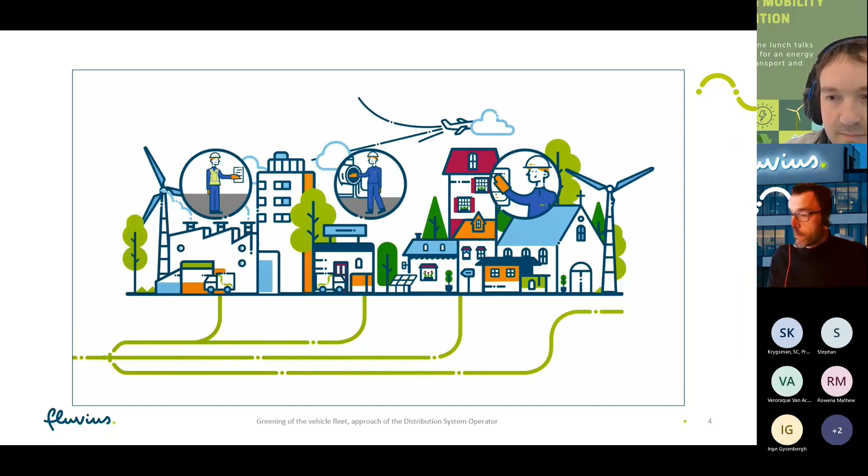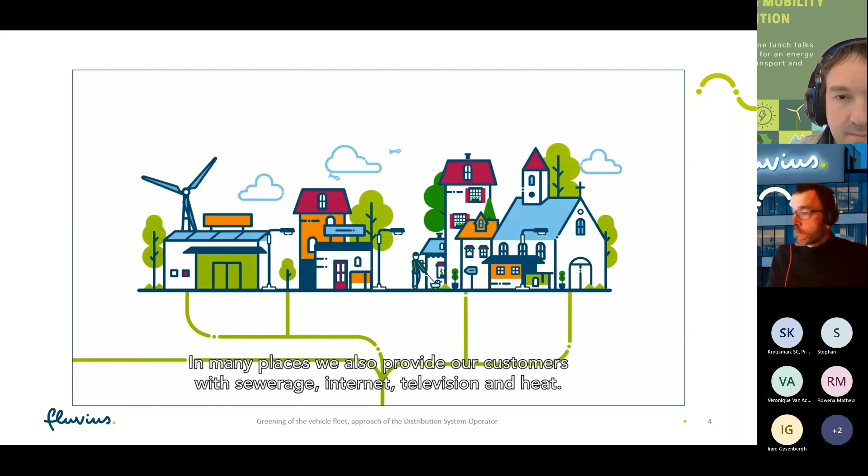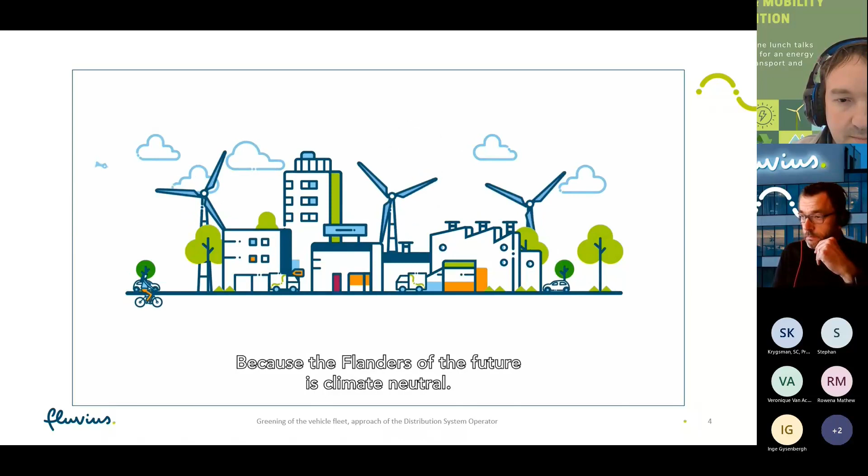As a network company, Fluvius manages the street pipelines and the connections of various utilities, bringing electricity and natural gas to everyone in Flanders. In many places, we also provide our customers with sewerage, internet, television, and heat. We even manage public lighting in Flemish cities and municipalities. Plus, we are building a new and super fast data network for everyone. But Fluvius is also very much part of the energy transition, because the Flanders of the future is climate neutral. That's why we are converting all public lighting to LED bulbs. This reduces energy consumption, as well as CO2 emissions.

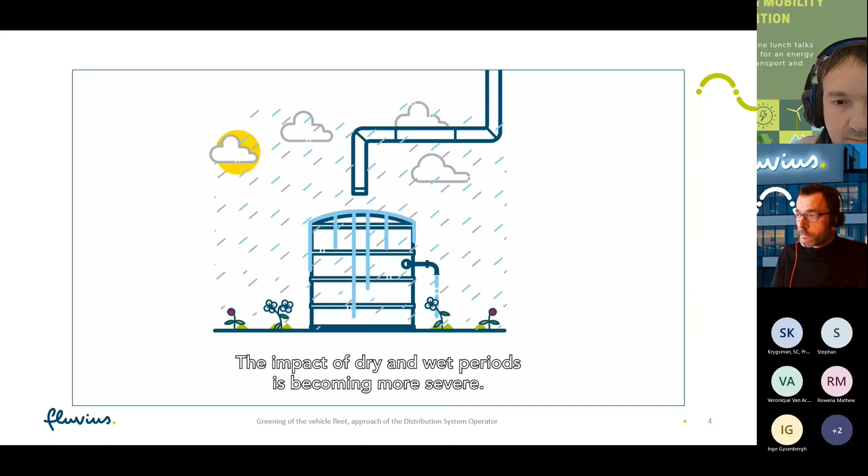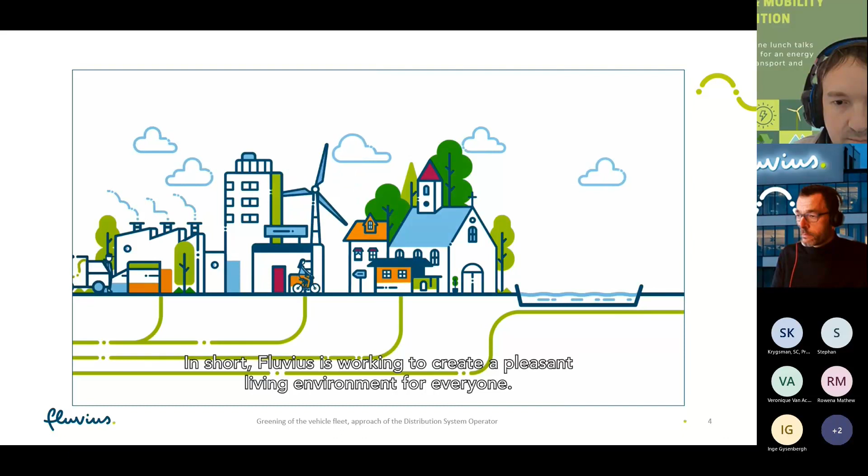In addition, we are digitizing and automating the energy grid, installing digital meters everywhere. This allows us to be more flexible with our grids and bring more renewable energy to everyone. This digital grid is also packed full of valuable data that we manage for our customers and for the energy market. Such information is, after all, essential for a sustainable energy landscape. Nevertheless, we must take climate change into account. The impact of dry and wet periods is becoming more severe. By investing in sewerage, holding basins, and rainwater plans, we are also preparing Flanders for these events. In short, Fluvius is working to create a pleasant living environment for everyone, today and tomorrow. Find out how we're doing it at www.fluvius.be.

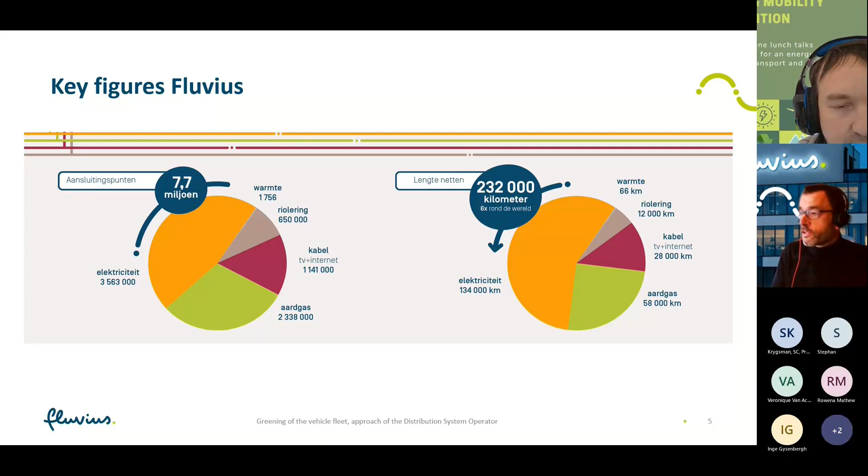So here is a summary of the key figures of Fluvius. We have almost 3.6 million electricity connection points and 2.4 million natural gas connection points. You see Fluvius everywhere in Flanders, and we are active in all 300 Flemish cities and municipalities.

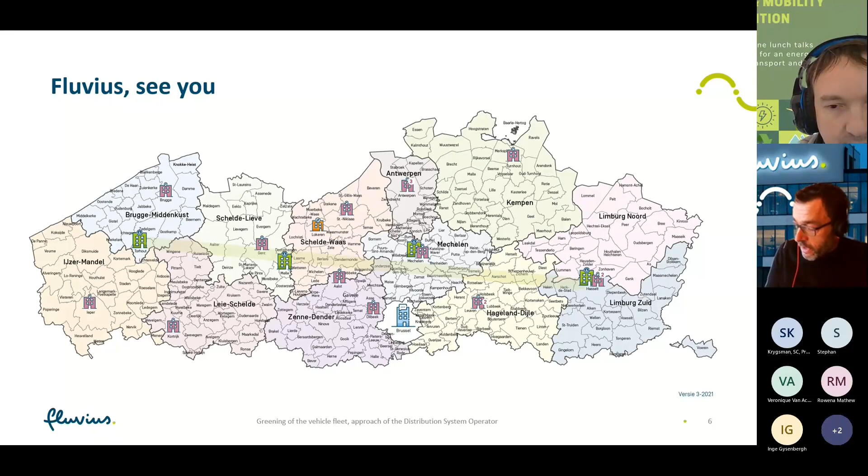But what's the future? From an energy transition point of view, the electricity network will play a key role in this. So the intended climate neutrality by 2050 requires an energy transition, and that's characterized by a significant increase in electrification. This poses major challenges for the energy system. And who is involved in this energy transition? There are some topics around mobility, heating of buildings, energy storage, decentralized production, industry and service, and local challenges.

So one of the key elements in the energy transition is greening of the vehicle fleets. And we see 4 types of electric vehicles with impact on the grids. So we expect that there will be 1.5 million electric cars in Flanders in 2030. That's a lot of cars that have a connection with the grids. In the longer term, public bus transport will be fully electrified. We will have full electrification in 2035.

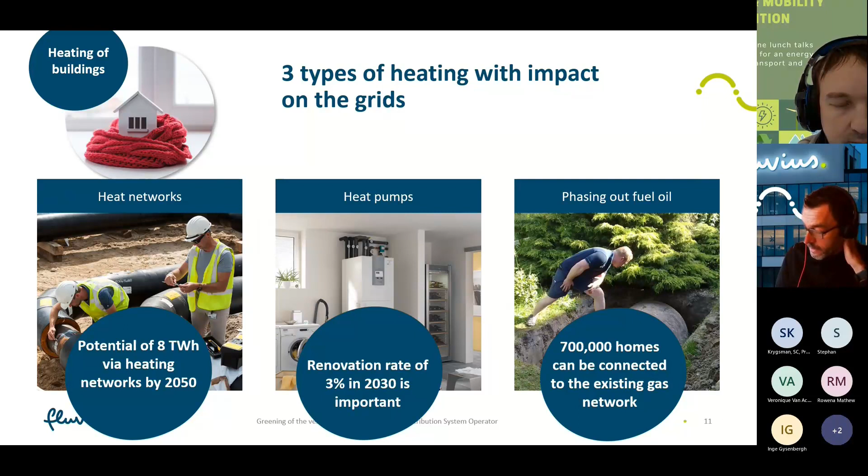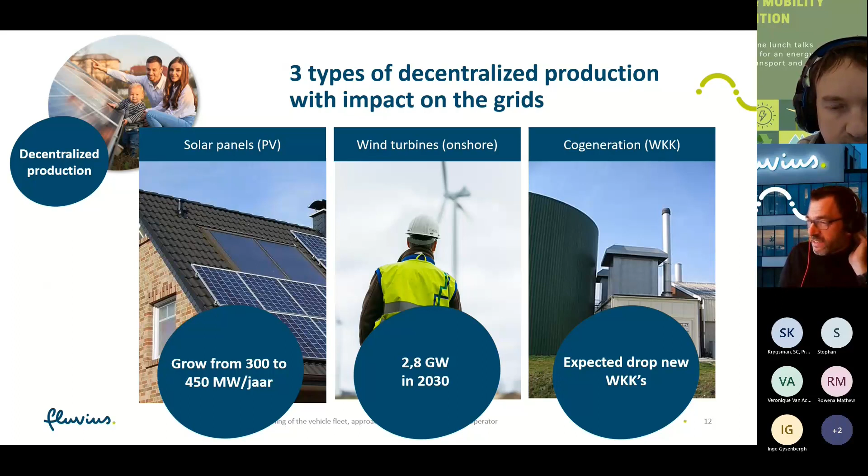And the heating of buildings is also important to make the grid ready, but it's more in the long term. In the short term, the most important is to have a grid to support the electric vehicles. Decentralized production will also have an important role. So solar panels will be everywhere, wind turbines also, and cogeneration will have less impact in the future. For industry and services, it's a trade-off between expected energy efficiency and expected industrial growth. But there also is a big increase in electrical consumption.

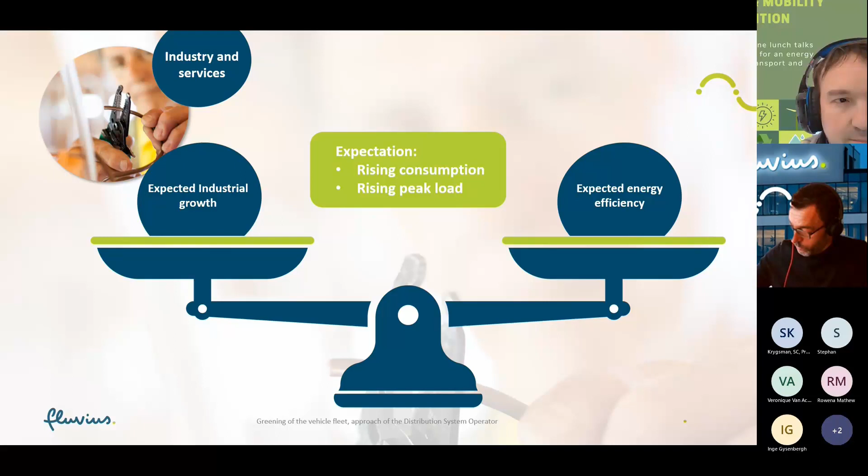Then the batteries. To keep a decentralized electricity network balanced, energy storage will also play an important role. If we look today, there are almost 50,000 home batteries installed in Flanders. Now there's less compensation in 2024, and the compensation is ending. So we expect a slower growth of the home batteries. But there is another solution with electric cars: bidirectional charging. We expect that this will replace the home batteries in the longer term.

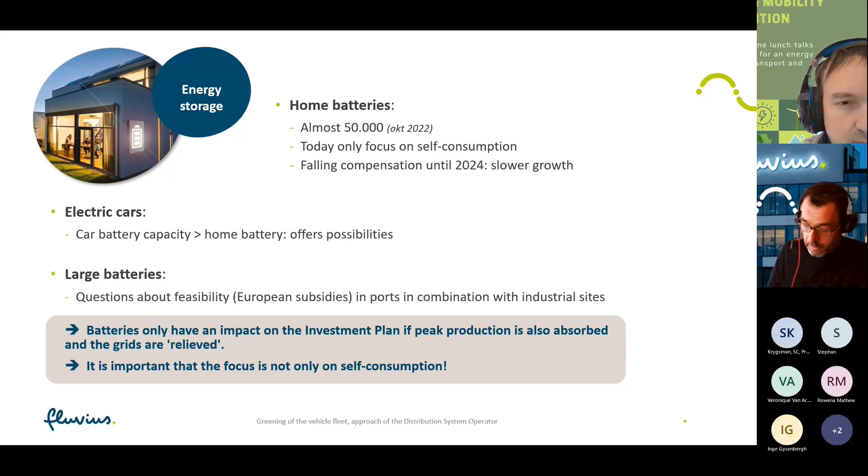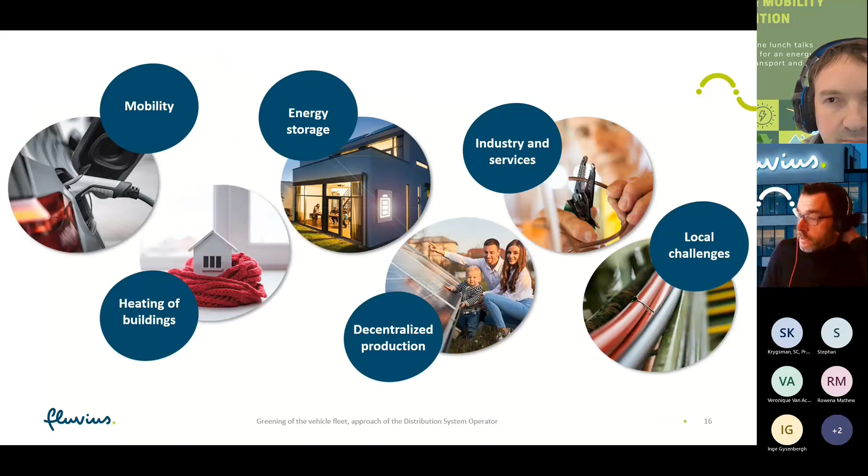So in Flanders, there are still major differences in types of electricity networks and power demands. In the historic centers, you see Bruges, Ghent, Antwerp, and mostly the periphery of Brussels, there are a lot of 230-volt 3-phase networks. So it's not so easy to charge a car with a 230-volt 3-phase network, and we also need a solution for this problem. These issues do not make the energy transition easy.

And if we look at the current network, then we luckily have no problems to supply the requested power to all existing consumers. But what's the impact of the electrification of the vehicle fleet on the electricity network? We have selected 3 scenarios. A high scenario with 1.9 million electric vehicles in 2030 in Flanders, with a simultaneous home charging of 60%. Then a middle scenario with 1.5 million electric cars in 2030, also with 60% simultaneous home charging, and a low scenario.

So let's see what is the impact with the middle scenario in 2032. Then we have a lot of congestion in Flanders. So the electricity grids will not be able to cope with the expected volume of electric cars. We have to make important investments in the electricity grids to meet the energy needs of the electric fleet. So we have made an investment plan based on the assumptions of the middle scenario. In the long term, these investments are necessary anyway, so there can never be any question of overinvestment.

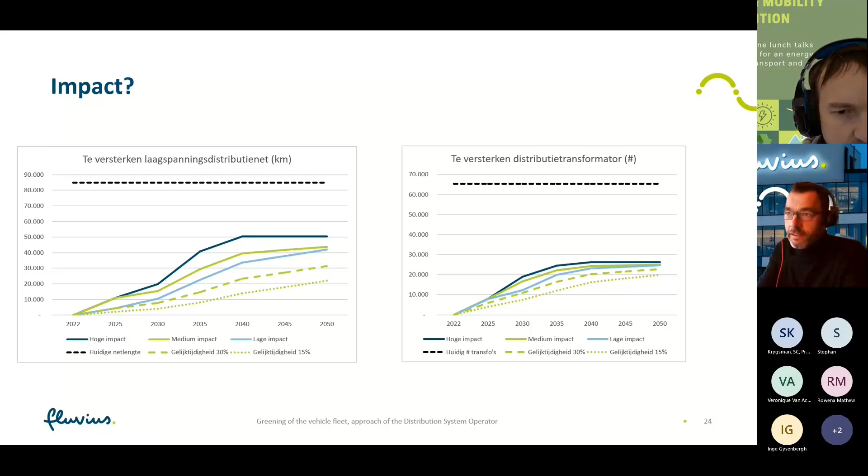And yet, these mitigation measures are still not so developed. So we cannot use them yet. Therefore, the no regret action plan. So balancing charging is important, but big impact is less realistic in the first years.

And then the capacity tariff. In Flanders, the capacity tariff will be introduced on the 1st of January. It's for everyone except the customers with the social tariff. You can read on the website of the VREG what the details of this tariff are. But let's look at the capacity tariff, why we need it.

Essential is the variable nature of renewable energy sources. This creates extra challenges to match demand with supply. And with the capacity tariff, we want to shift the extra energy consumption to off-peak without the increasing use of EVs and heat pumps translating into higher grid costs for customers. So with the capacity tariff, there will be no higher grid costs as long as the households with an EV and/or a heat pump watch their peak consumption.

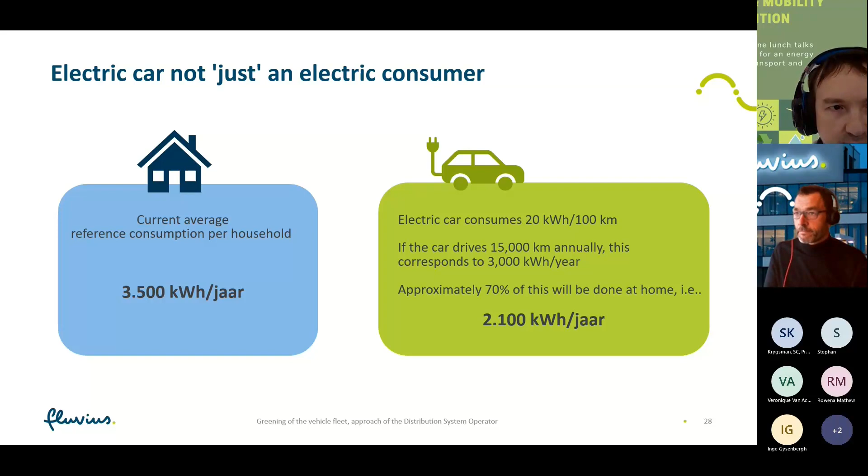Charging at home almost doubles your electricity consumption. If you look at a car that drives 15,000 kilometers a year, with an average consumption of 20 kilowatt-hours each 100 kilometers, then you have almost 2,000 kilowatt-hours extra energy consumption. This will not only take place at home, it's also at work and on the go. But I think at home and at work is ideal because the electric vehicle is left unused for a longer period of time. So charging at a lower power is more than sufficient.

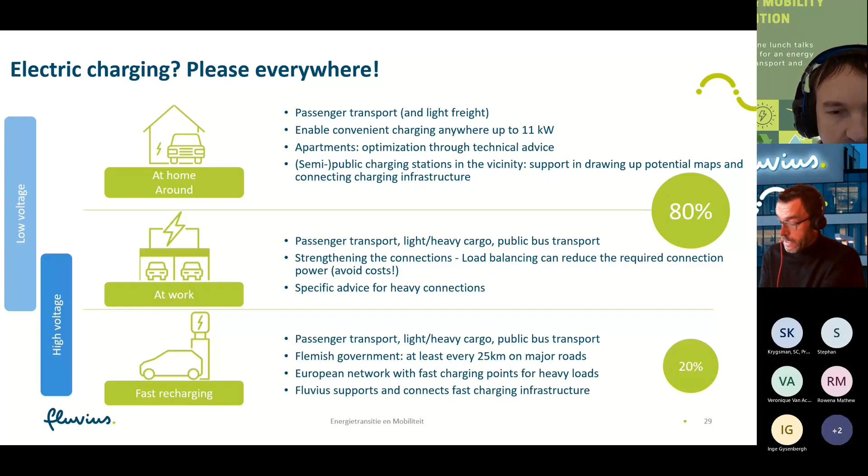How do we view home charging in terms of impacts on the grid? Well, the customer can decide for himself, depending on his driving behavior. If you don't drive so many kilometers, a single phase charge point is sufficient. If you drive a lot of kilometers, then a three-phase charge point is necessary. And in the future, if there are more flexibility services, then you have to take this into account too to decide if you need a single phase or a three-phase charge point. But the customer can decide.

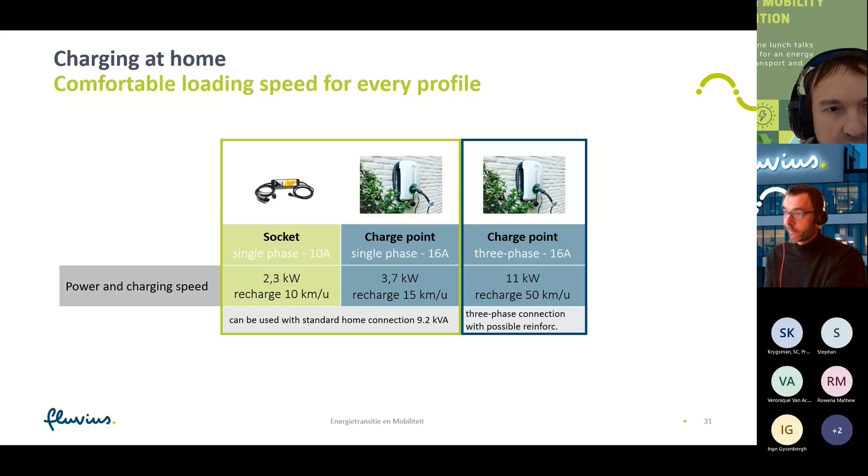If you have smart charging behavior, you will be rewarded with the introduction of the capacity tariff. Now, the classical tariff depends on the count of kilowatt-hours that you consume. And with the capacity tariff, it's the count of the kilowatts, the peak demand. So it's better for high power consumption users in case they watch their peak demands. So Fluvius, in this way, Flanders will support the higher electric demand without extra costs for the customer if he watches his peak demand.

So the EV, we expect, will be an essential element in the future grid. It's not just charging. You can also use it as a battery. We think of vehicle to grid and vehicle to home solutions. It's already possible in Belgium to do bidirectional charging. You have bidirectional charging points. You have cars that support bidirectional charging, but there is not quite an offer of these solutions yet.

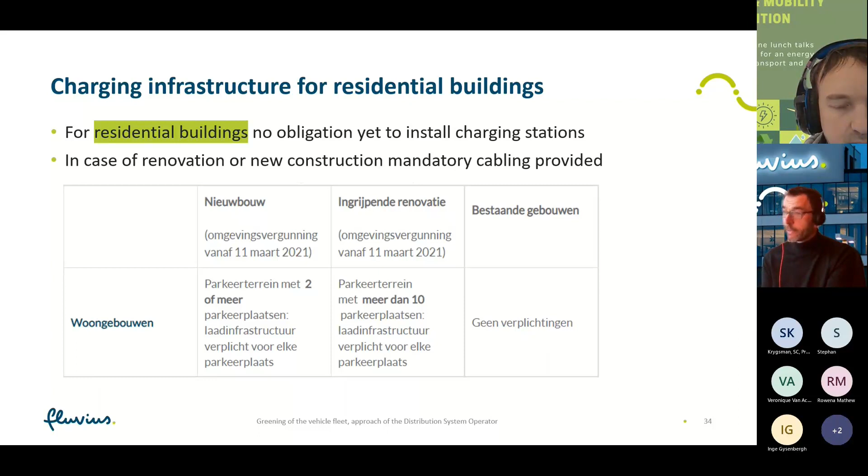For complex situations like apartments, it's not so easy to provide charging points. Every building has its own problems. So it's a solution that's only for dedicated buildings. It's a tailor-made solution (op maat). And there it's important that we have a collaboration with all the parties involved.

Fluvius can give a solution. We can offer a connection with the grids. We can offer a heavier connection with the grids. But we don't say what the solution is: you have to do charging at your own meter, or you have to do collective charging. It's up to the customer to decide the solution. So cooperation with the parties involved is very important to offer a practical solution, a practical roadmap to the apartment owners.

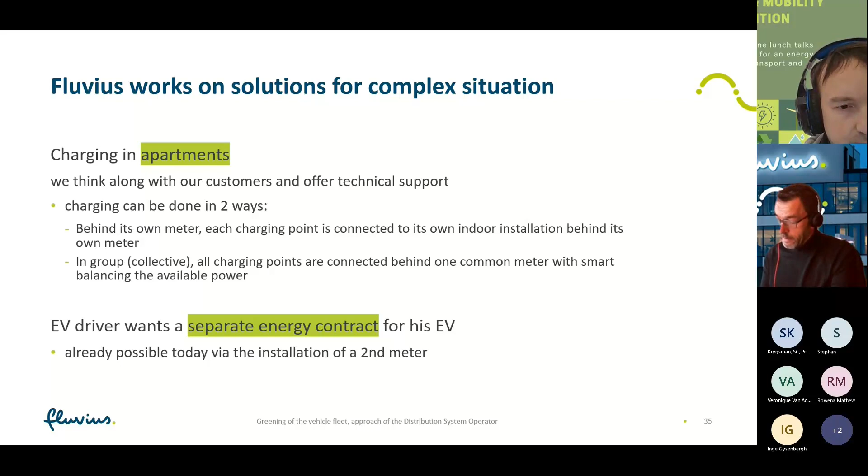So not everyone can install their own charging station. What about these customers? There we have the Flemish government, where these households can request a public charging station to enable charging near the home. So in this case, at a maximum walking distance of 250 meters, you can have a charging point near your home.

Then at work, the cars must also have a charging option to facilitate electric mobility. And there is an obligation. Every car park of a large business or company with many employees or visitors must have 2 charging stations by 2025, even if they do not apply for an environmental permit between now and 2025. It's an important obligation. Every parking with more than 20 parking places needs at least 2 charging points.

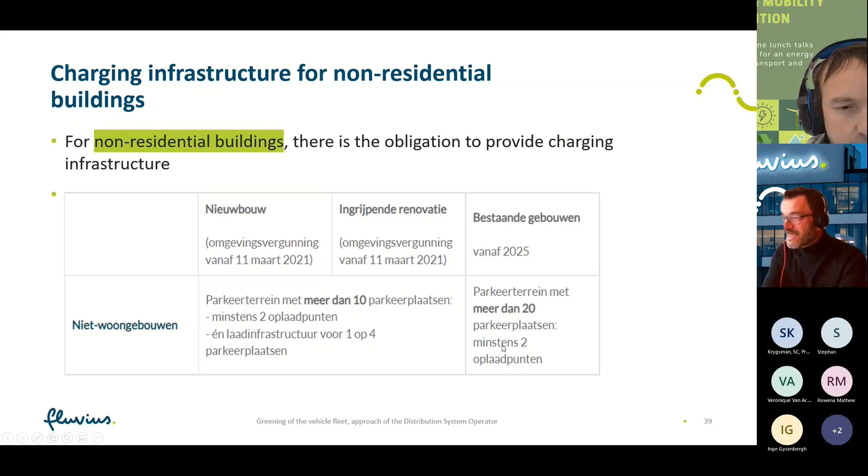So there are a lot of requests at Fluvius to provide the necessary power. And not everyone knows how much power he needs to provide his parking with the necessary charging points. And Fluvius thinks along with these customers to make a solution that's not too heavy, but that allows the charging that you expect. A solution-oriented connection that we will offer.

How is this with charging on the go? There is a solution of placing ultra-fast chargers along the major axes to enable bridging longer distances quickly. And at this moment, there are already 400 public fast charging points in Flanders. What's the role of Fluvius? Fluvius takes care of connecting any charging point with the necessary power.

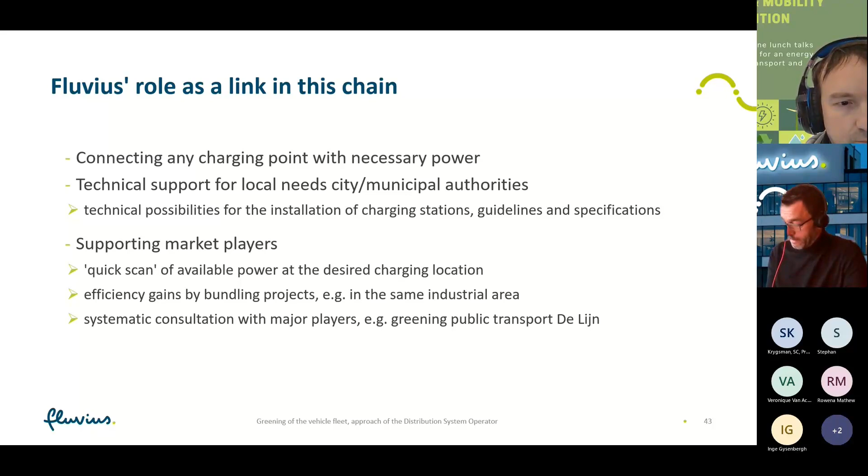For Fluvius, it's also important that all installed charging points are known, because we need this knowledge to be able to better estimate the impact of future flex applications. If we have no knowledge of the charging points, then it's difficult to make future calculations of how flex applications can avoid congestion on the grid. So we are working to make it easy to report the charging points.

What should we remember? We work with our investment plan to support a climate neutral Flanders by 2050. Energy transition is a leverage to do this, and Fluvius ensures a feasible and affordable energy transition. We have to do a lot of investments in networks. And we see two essential fundamentals: the digital meter and the capacity tariff. The digital meter to support the digitization of the grids in the future, and a capacity tariff to spread the power demand.

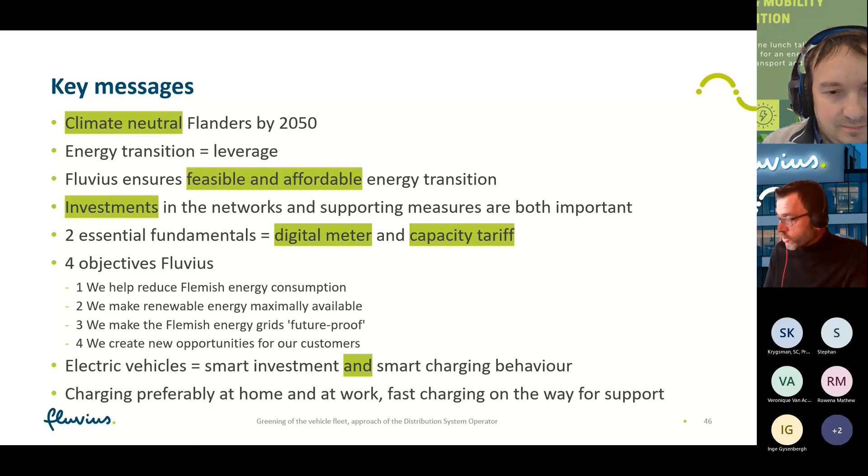So that is my presentation on what Fluvius has done to support the increasing demands on the energy system. Are there some questions? Thank you very much for the nice presentation. So if you have questions, please raise your hands, and then you can open your microphone to ask a question.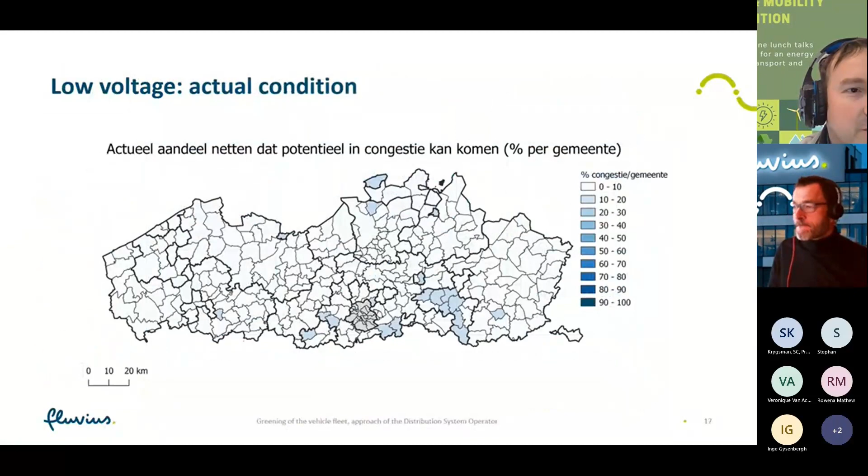Maybe I have a question regarding the update of the network. I'm living myself in the Limburg province, and there we see that sometimes people with solar panels already have the problem of too much solar production at certain moments. So I guess the reinforcement is also dedicated to tackle this kind of problem, so that the transition from a home perspective towards, for instance, more solar panels is caught, right? To what extent does bidirectional charging with your electric vehicle provide a solution here?

Yeah. You see it here, Mario, voltage problems on the low voltage grid in rural areas. It's typical for Limburg. The investment plans take into account also these problems. There will also be a solution for this problem.

And electric vehicles, are they a part of the solution, or do I see that wrong? No. It's without, because with electrical vehicles it's easier to solve this problem because you consume the energy that you produce. So the voltage drop will be less of a problem. But we do not take into account the possibilities of the electrical vehicles to solve this problem.

And maybe I have a related question to that. Part of the solution is the fact that electricity is demanded at the moments that there is a surplus on production, especially during the day. But I think most installations are at home locations and not necessarily at our work locations.

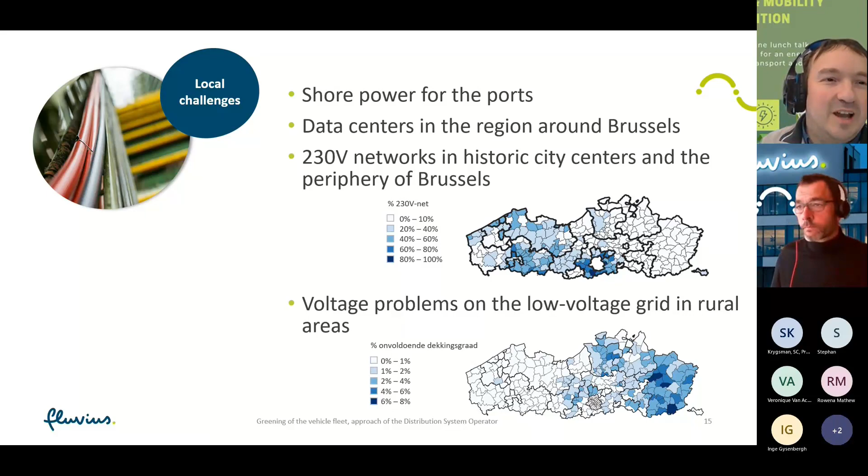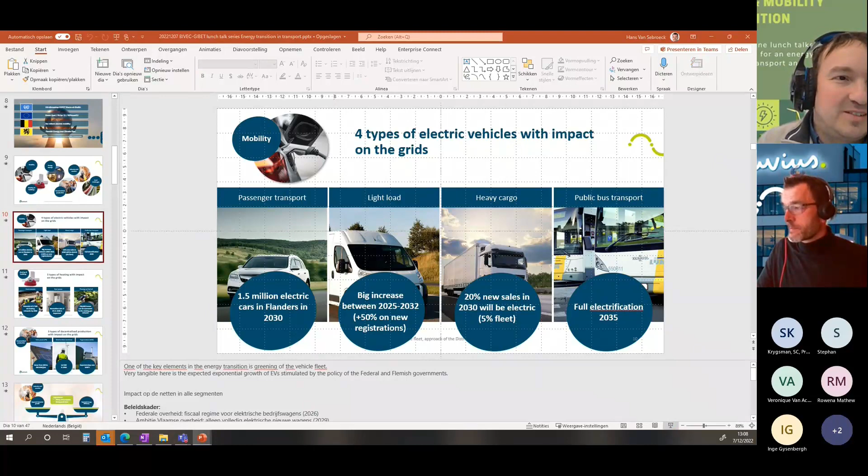I think in the scenarios of electrification, you already indicated this, the types of cars that are allowing bidirectional traffic for electricity are the more expensive cars in the market segment. Do you think this will rapidly change? That more car constructors are providing this type of cars, or what are the perspectives on that?

It's a difficult question. What we expect is that 1.5 million electric cars in Flanders will be there because of the fiscal stimulants in Flanders. There are a lot of lease cars in Flanders. So there are measures to stimulate having an electric lease car instead of a combustion lease car. So we think that there will be 1.5 million electric cars in Flanders in 2030.

But beyond this date, it's necessary that there will also be cheaper cars. We hope that with the big volumes of cars, the price will decrease. But we are not sure. It depends on the car manufacturers.

Yes. But maybe it's like the solar panels. In the beginning, the solar panels were expensive, and now, if you look at the solar panels, there's no question about doing it. It's a question of having a return in 2 years. Yeah, maybe. It's also availability. It's everywhere, the availability. Yeah. If you need a Raspberry Pi, no, you can't find it. Yes. But the electric car, you find it in 2 years, hopefully.